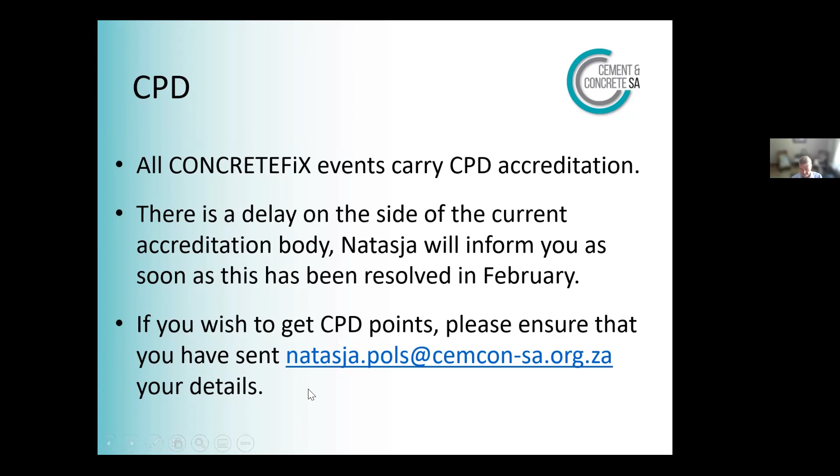Now the good news. On the 17th of February, next month, at 10 o'clock in the morning, there'll be a site visit arranged by the Inland Branch to the Vlakfontein Reservoir in Benoni. The invite will go out next week, giving you detail on where to book. There will be limited seats available, so keep your eyes and ears open for the invitation. And that afternoon at 3 o'clock, we've got our second CONCRETEFiX for this year, with speaker Mike MacDonald talking about his chapter on control of concrete quality and quality systems. So two exciting events coming up in February.

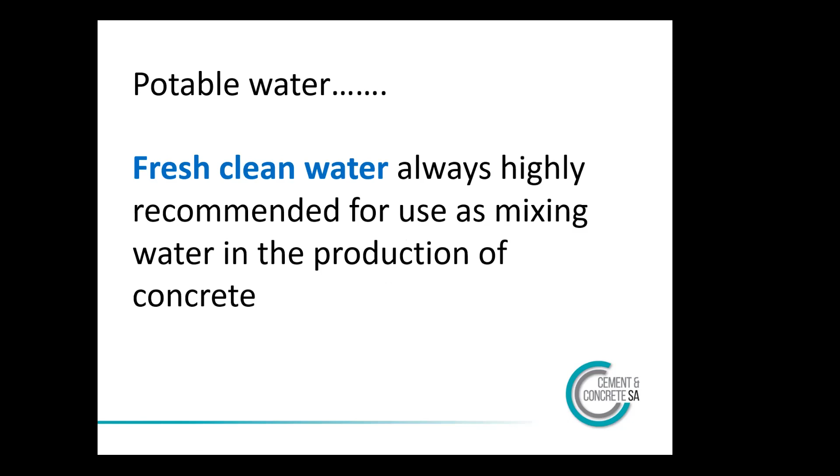So, mixing water for concrete - we always taught on all our courses that we want potable water, water that we can drink, municipal water. That's the water we want for concrete. So fresh, clean water, and I'm going to talk about fresh, clean water now in the next few slides. But that's really what we're aiming for. But are we really aiming for that? I think after this presentation you'll see there is scope for not always using fresh, clean water.

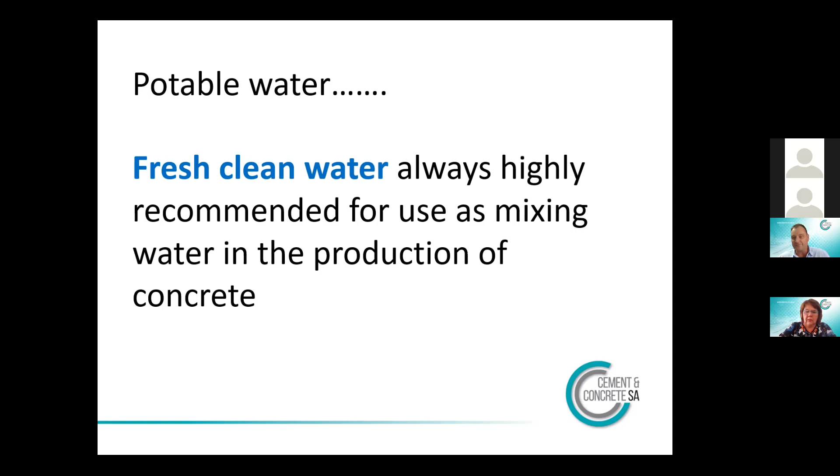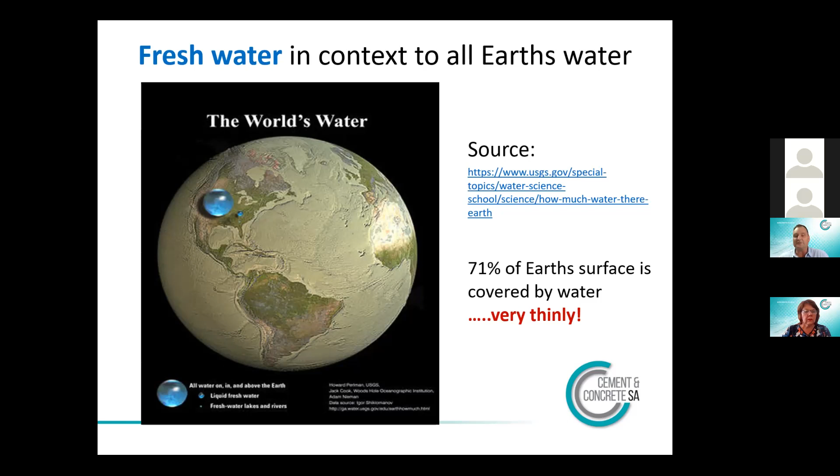That's the fresh water. Remember, I told you we want fresh, clean water for our concrete mixing water. So that's all the fresh water in the world. You probably won't be able to see it easily, but there's a very slight dot below the second biggest one, my cursor is on it. If you look at the bottom of the slide you'll see the little light dot. That's all the water sitting in our dams, reservoirs, lakes, rivers and swamps, and that's the water we use for our concrete. So you can see there's very, very little water available for use by human beings.

Let's look at those numbers. About 2.5% of all Earth's water is fresh water, only 2.5%. And of that 2.5%, 0.3% is found in lakes, rivers, and swamps, and this is the water we use for our concrete. Making matters worse, 87% of that 0.3% of fresh water is held in the great continental lakes.

Every continent has these big lakes. For example, in Russia, Lake Baikal contains about 22.6% of all the available fresh water. And in Africa, its Great Lakes hold 29% of that 87%. So you can see there's very little other water. We don't have access to the Great Lakes.

It's quite interesting that in Africa, the nations sitting around the Great Lakes are very susceptible to famine and droughts because they don't have the infrastructure to get hold of that water sitting right next to them. So it's also important for countries, and for South Africa, to have an infrastructure that can deliver fresh potable water to the concrete producers and to the people.

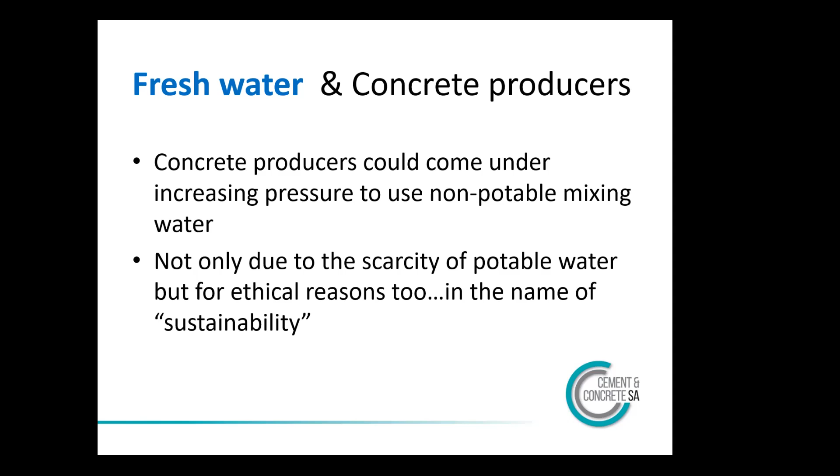Let's get on to the mixing water in concrete. I put this up for a bit of fun: what is concrete mixing water used for? When I was writing this slide, I could think of six things off the top of my head. I'm sure there are others, and it would be nice if you could think of some and put them in the chat. Just quickly think if you can come up with at least six different uses for mixing water in concrete. Why do we use it? Think about it, and I'll put up the list I came up with.

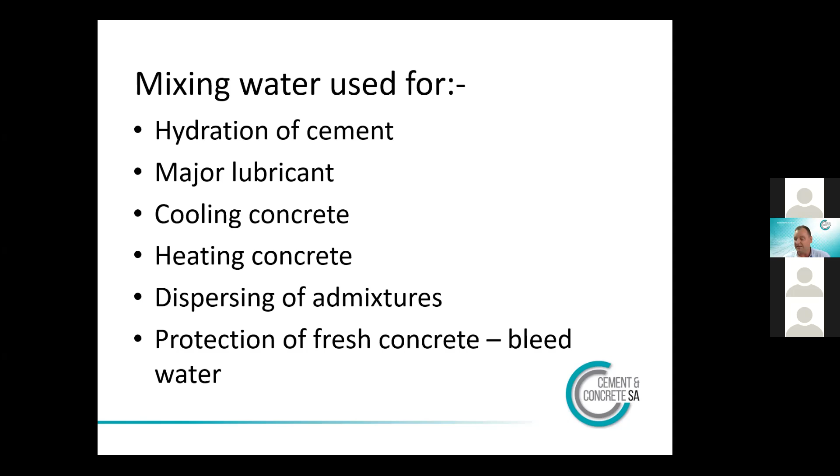Admixtures can be very reactive. You never want to put your admixture straight with your binder because it will latch onto the binder it meets first, so you want to disperse it as quickly and evenly as possible through your mix. Mixing water is used for that, as an excellent disperser of admixtures. Another use I came up with is for industrial floors, these big open sections of concrete vulnerable to drying out. A little bit of bleed water coming to the surface will stop plastic shrinkage cracks and early age cracking in its tracks, so always consider that a use of mixing water.

I'd love to see other people come up with other uses for mixing water in the chat.

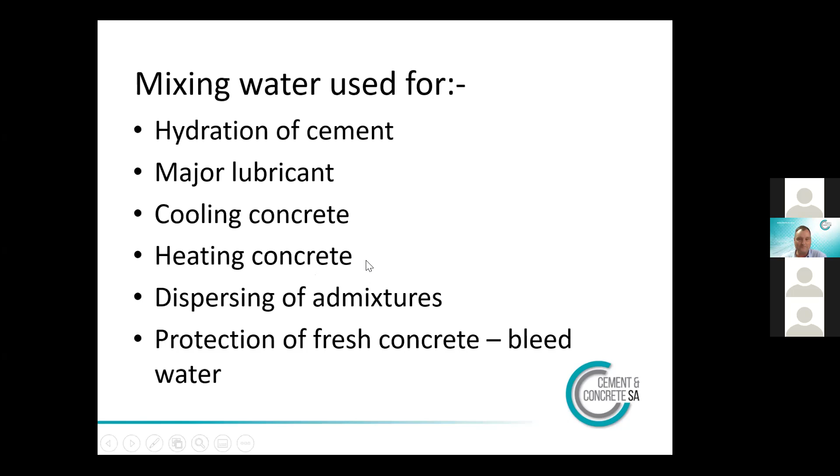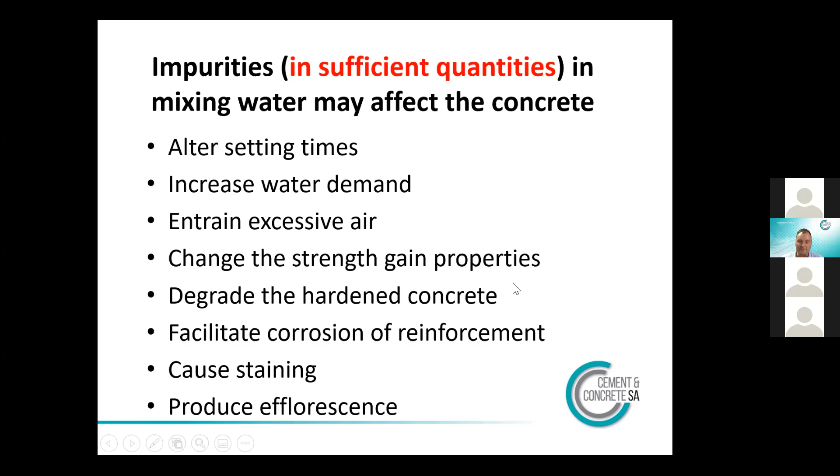Right, so it's a bit of a tongue-in-cheek slide that I put up here. So mixing water can cause havoc with your concrete. And I asked the question, really, can it? What I'm trying to get at here is that don't stress too much. I think a lot of people stress about the mixing water, and most times the mixing water will be fine. So I'll put up a couple of slides here to show you why I don't think you should stress too much. But having said that, always be careful with your concrete.

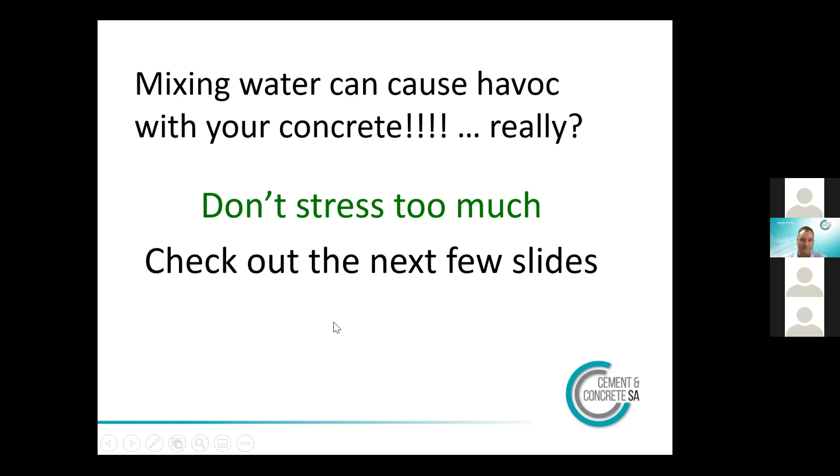All right, so when I was asked to review the water chapter, I thought I'd read extensively about mixing water. And Sue, I know you're watching. I went to Sue in the library and I wanted as much as possible on mixing water. Well, can I tell you something? There's almost nothing on mixing water because people don't worry about it. It's not a big thing in concrete production. And I think there was a little chapter on this in the book by Mindess and Young, referenced in the chapter.

And they said this, and I think this is the sensible thing about mixing water. They say poor quality concrete is produced more often from adding too much good quality mixing water than using the correct amount of poor quality water. And I think that's the sort of thing we've got to remind ourselves about, that it's not always a disaster if you haven't got fresh, drinkable water. Rather put a lot of emphasis on making sure that you get the right quantity, not too much water, than using the incorrect water.

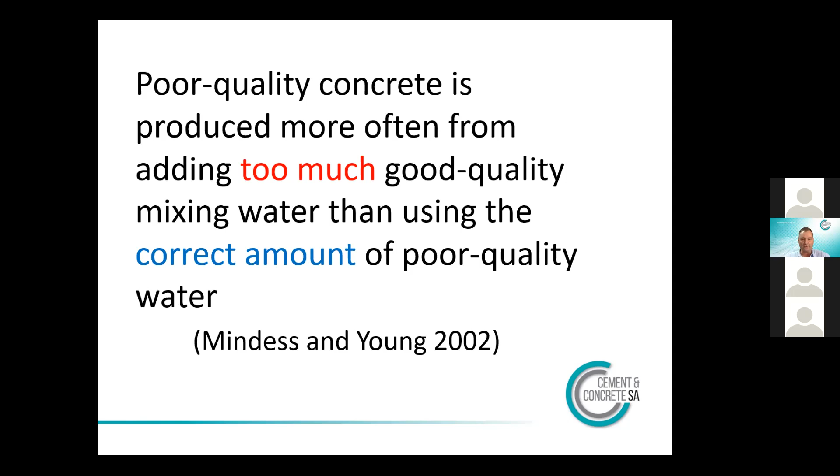This is just an example of if you've got deleterious, bad substances in your mixing water. 2,000 milligrams per liter of total dissolved solids in mixing water only equates to about 400 grams per cubic meter of concrete. 400 grams as compared to 2,400 kilograms. You see, it hasn't got much bang for its buck. You've got to have a lot of impurities in the water to make a big difference.

I know if you're a good admixture salesman, you won't say that your admixture quantities have to be very low to have an effect. You'll always say you need a lot of your admixture to make a difference to the concrete. Why? Because you want to sell more admixture. But the fact is, you usually need quite a lot of material to make a difference to the plastic and hardened properties of concrete.

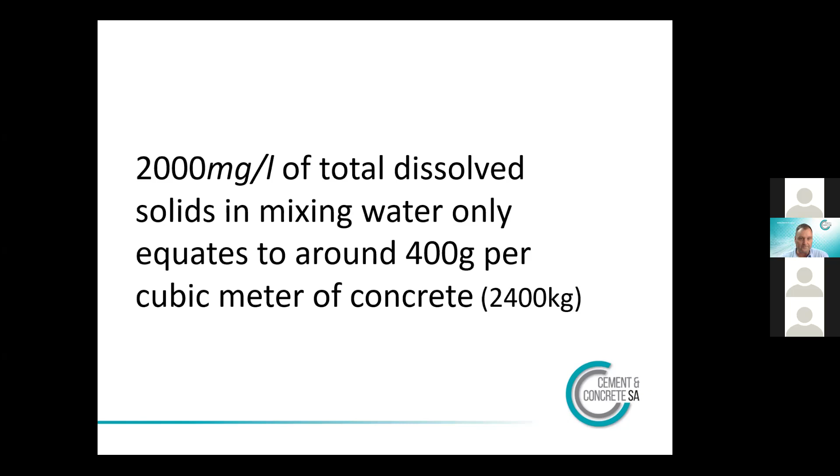Right, so this is another thing that I want you to keep in mind. If the chemical composition of the poor quality mixing water remains consistent, in other words, it stays the same concentration, then the chances are you could design your concrete around the poor quality mixing water. But it must remain consistent.

I had a guy once phone me from Mozambique, and he was saying that they were making concrete. They've been doing it for many years, and every now and again, his concrete just doesn't get the strength. It doesn't set and doesn't gain strength. So I spent about two hours on the phone with him, going through every single scenario that he had tested and double tested, and he said it couldn't be that scenario.

So eventually I gave up and said I can't help you, and I just blamed it on the cement. That's what we always do, we always blame it on the cement. But anyway, as we were saying goodbye, he happened to mention he worked for Illovo Sugar, and there was his problem. Every time they harvested the sugar cane, his concrete dropped in strength, because they were taking the water out of a reservoir that the sugar plantation drained into.

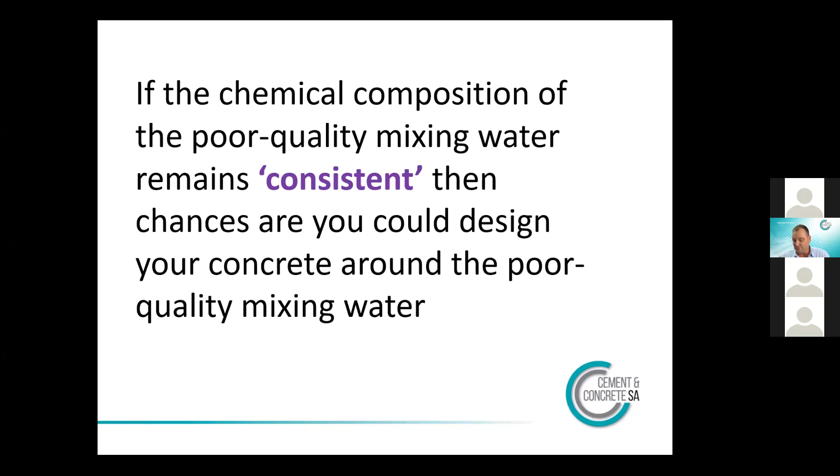We'll go through a few of the important impurities we need to look out for in our concrete. Chlorides, of course, I think everybody knows. We really don't want chlorides in our concrete if we've got embedded steel. SANS 10100 part 2 says to minimize the chloride content in reinforced or pre-stressed concrete, we need to make sure the mixing water has less than 500 milligrams per liter.

And we can't use seawater at all, or brackish water. Accelerators like calcium chloride and other admixtures containing chloride, we need to watch the quantities in those. But remember, it's the overall quantity of chlorides in your overall concrete. So you might have a reasonable amount of chlorides in your water, but if there are no other chlorides present, you might be able to get away with it. Not saying you should exceed these limits, but just remember it's the overall quantity.

And the same applies to sulfates. High chloride contents can also affect the strength of concrete and the strength gain. You often find with chlorides you get an accelerated strength gain, but your eventual potential strength is dropped a bit.

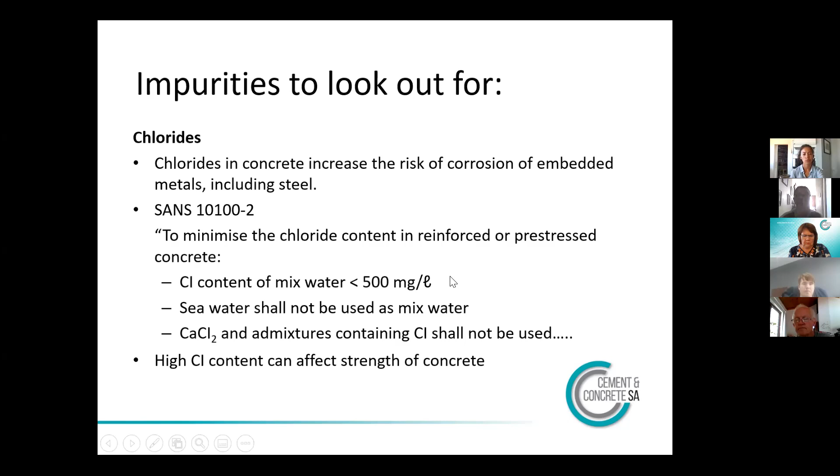Sulfates - I don't like spelling sulfates like this, but in the Fulton's we spell it this way because that's the internationally accepted way. But the British way is spelled with the 'ph'.

I think we all know sulfate attack. It can react with hardened cement paste, causing expansion, softening and spalling of the concrete.

SANS 51008 is the standard for mixing water, and that gives an upper limit of 2,000 milligrams per liter in sulfates. SANS 10100 Part 2, which is basically a guideline, a best practice for concrete works, limits it to a maximum of 4% by mass of the cement.

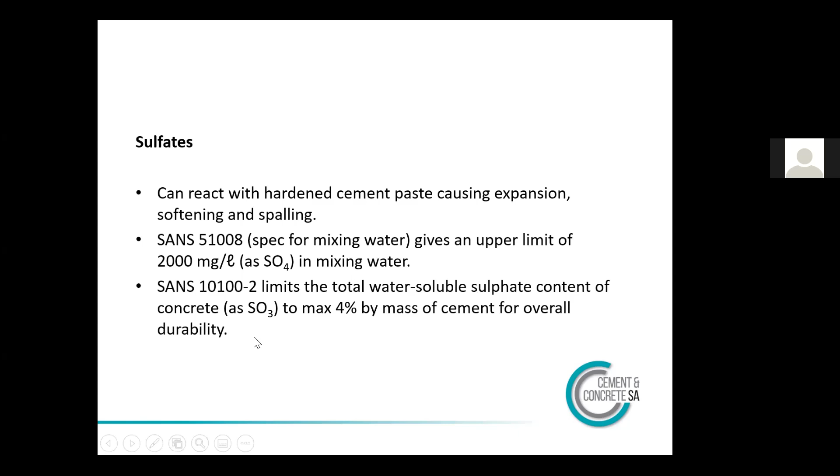Sugar is a funny one because there's an anecdote - people always used to say the guys with the ready mix trucks used to drive around with a bag of sugar and put it in the back if they didn't want their concrete to set.

So we really want to limit our amount of sugar in our concrete, and there's also a reduction of 28-day strength. So we try and limit it to below 500 parts per million of sugar in mixing water. Generally you won't have any adverse effects. I think the code, you'll see later, limits this to a much lower amount, but you'll probably find the standard is quite conservative.

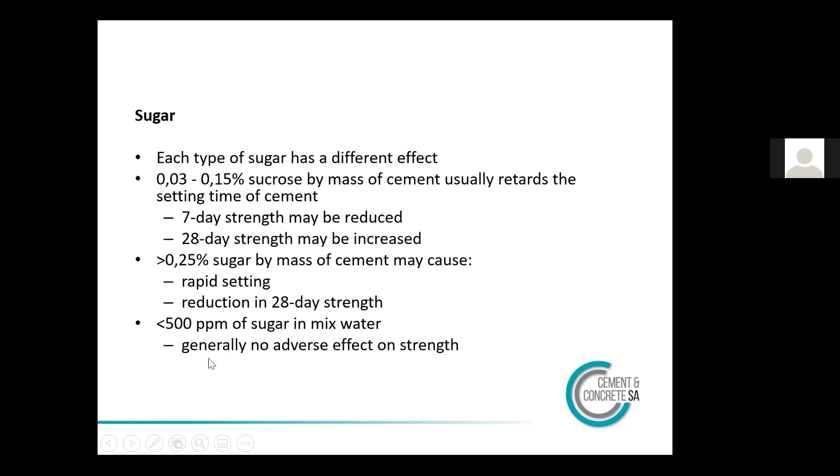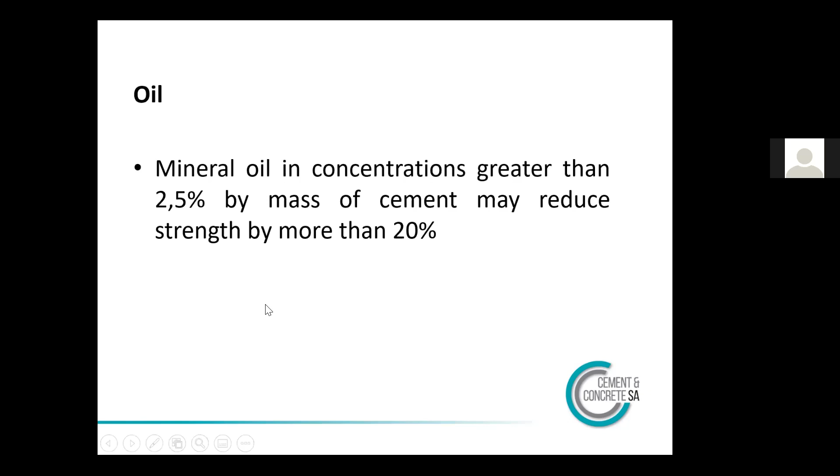Humic matter, maybe all of us just call it organic matter. It's created by the breakdown of carbon-containing components of animals and plants, and typically they retard setting and decrease the strength gain. You can look up more impurities in chapter 5 of Fulton's.

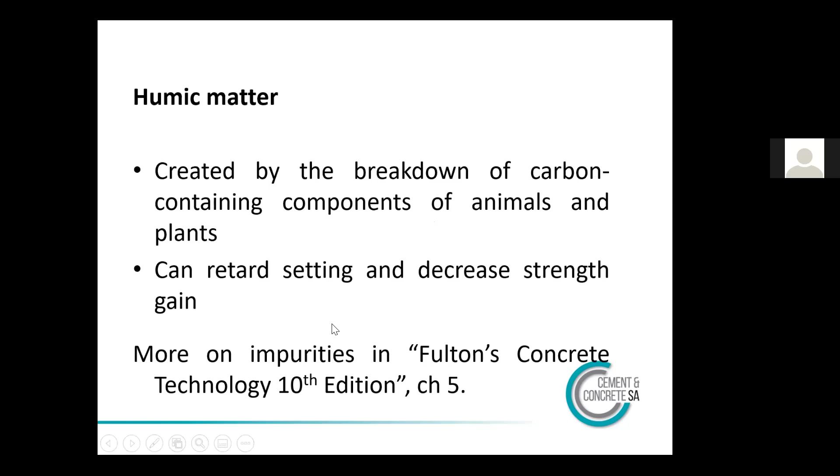All right, natural waters occurring in South Africa. There was a Mr. G.W. Bond, not James Bond. In 1946, he did an intensive survey of all the natural waters occurring in South Africa. Basically, the outcome of that is that most are suitable for using as mixing water for concrete, with a couple of exceptions. Dissolved salts, mainly in the northwestern Cape, tend to be a very salty water. We talked about that earlier.

River water in sugar farming areas is not suitable. Remember, turbid water contains floating solids or solids suspended in the water - clay and silt. Silt tends to filter out quite easily, but clay doesn't settle very quickly. You should really have big settling tanks if you're using turbid water, to let it settle before using it.

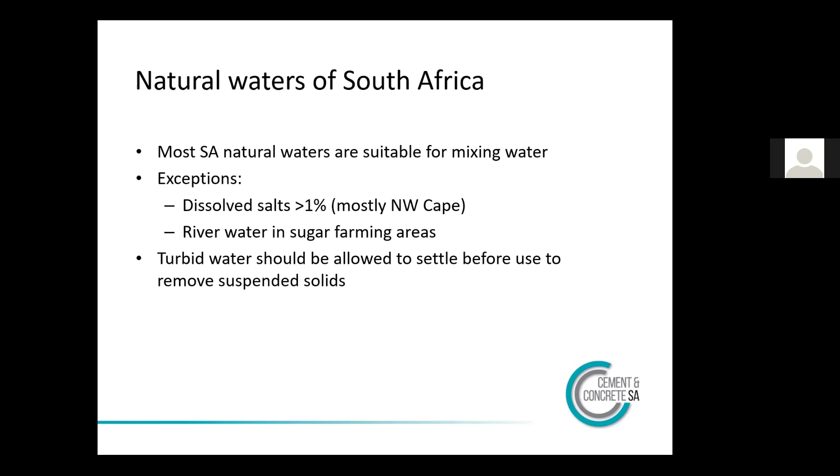So we come to the code SANS 51008, which is the European code 1008. It covers mixing water for concrete, specifications for sampling, testing and assessing the suitability of water, including water recovered from processes in the concrete industry, as mixing water for concrete.

To be honest, I find standards hectically boring things. Anybody who has to work with standards, I feel very sorry for them. But anyway, this code, I looked it up quickly before the lecture - it costs 466 Rand and 55 cents. That's what it costs. It's well worth getting.

If you're going to produce concrete, or you're an engineer wanting to specify your concrete, it's well worth getting this, because it gives you a lovely process of going through the water that you potentially want to use with your concrete. And if you've done the testing according to 51008, if something goes wrong later, you can at least say, listen, I did the water testing properly, the water is okay.

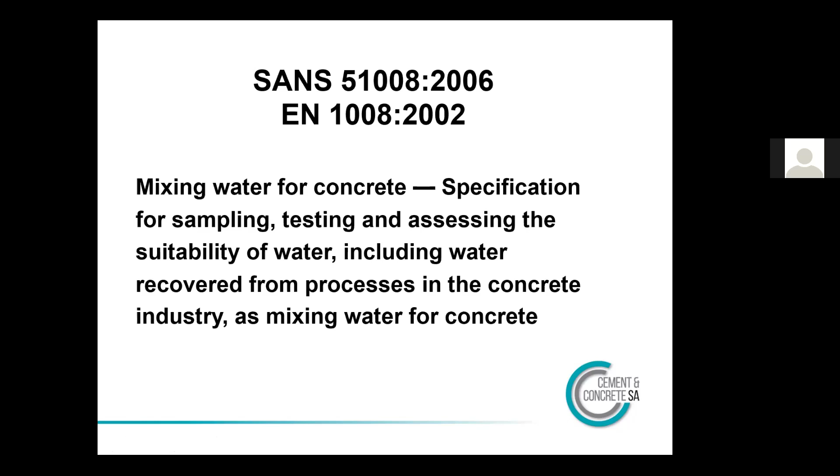Just before we get into the actual standard, let's talk about the South African standards that point to this mixing water code. Your SANS 2001 CC1 is basically a requirement - you have to do your structural concrete according to this standard.

And there it says water shall be clean and free from injurious amounts of acid, alkalis, organic matter, and other substances that could impair the strength or durability of the concrete or metal embedded in the concrete. And where required, in terms of the specification data, it must comply with the requirements of SANS 51008. So it does point, it says use 51008.

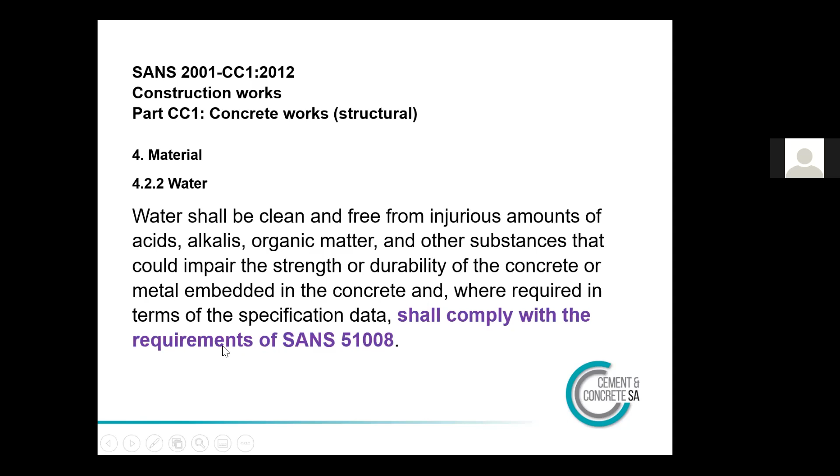Make sure it complies with that. And then the SANS 10100 Part 2, which is the guideline and best practices for concrete, also recommends that water should comply with the requirements of SANS 51008. And if in doubt, we need to specify that it needs to be tested according to 51008.

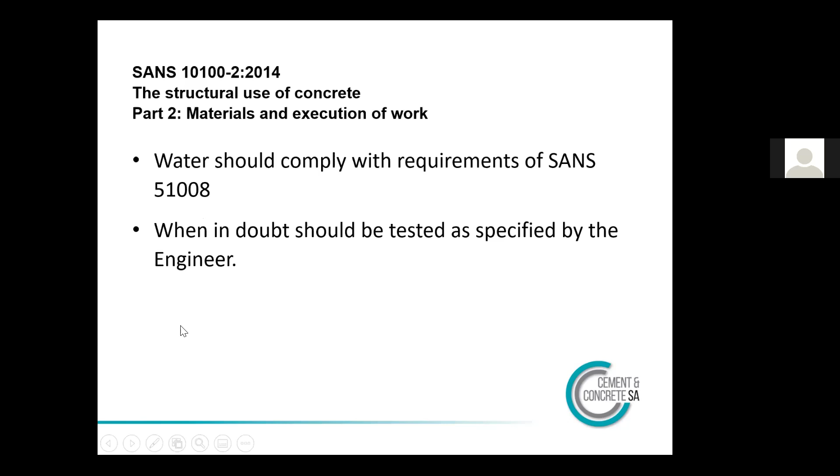If we have to do further testing, then we do a preliminary assessment before we go to chemical properties. If we're okay with the preliminary assessment, we might be able to use the water. If not, we might want to go do some more chemical testing. And if it passes all the chemical testing requirements, then we can go and check for setting times and strength. The code tells you how to sample and tells you what tests to do.

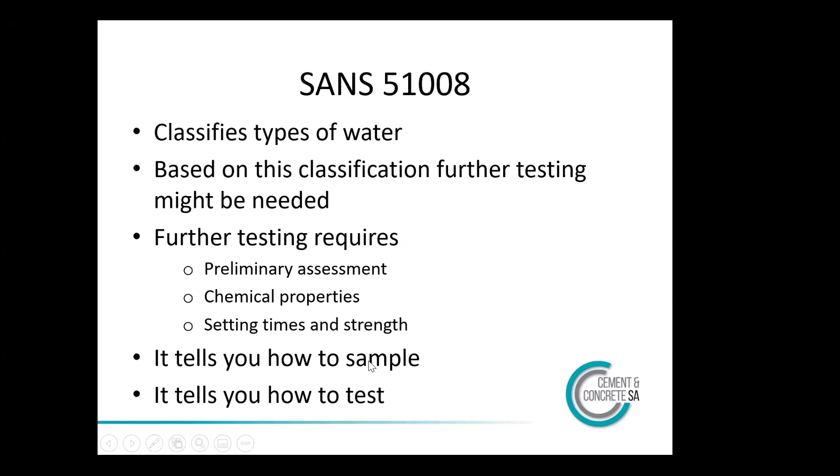But you guys from the ready mix companies, I think you are pretty good at reusing your recycled water, your wash water, etc. I think most good ready mix companies do use it. It saves money, and in many cases it can lead to a strength gain, can give you an advantage by using it.

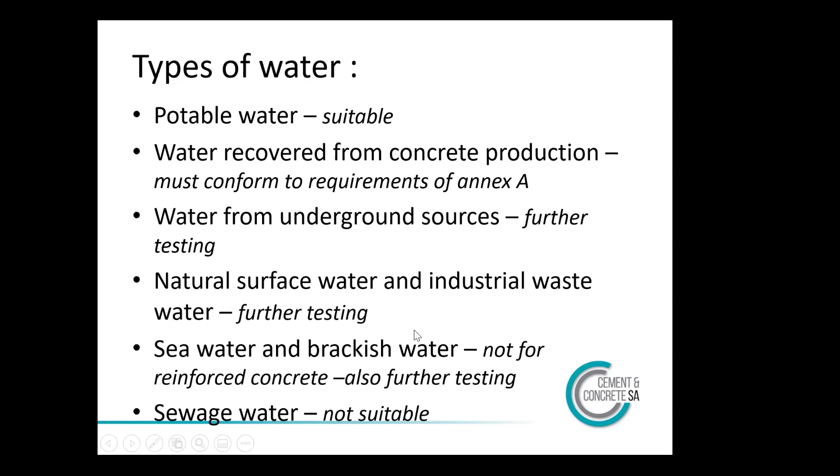Water from underground sources, you might want to assess it further. Natural surface water and industrial wastewater, you would also need to double check by doing further testing and assessment. Seawater and brackish water, you can't use it for reinforced concrete, but you can use it for non-reinforced concrete, but I would do further testing. You want to know the setting time, the eventual strength it gets to, and design your concrete around it.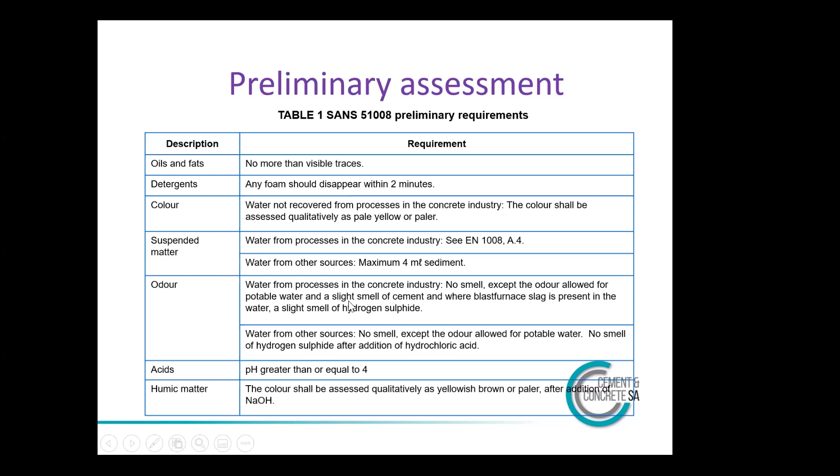All right, so you then go and do the chemical properties, and you check for your chloride content, your sulfate content. If you've got reactive aggregate, you'd be worried about your active alkali content. And then there are a few other contaminants that they mention. It's not really clear why they chose these particular ones, but maybe they're the ones in Europe that come up the most often, so I'll bring them up now.

Okay, so sugars, you see how they're limited to below 100 milligrams per liter. Phosphates, nitrates, lead, and zinc. So all of these - it's quite interesting that the top 2, sugars and phosphates, and the lead and zinc, they tend to retard the setting and in some cases the strength gain of the concrete. It's just the nitrates and nitrites that we worry about, because they tend to accelerate the setting time. And the guys that work for admixture companies will know that a lot of accelerators are based on nitrates.

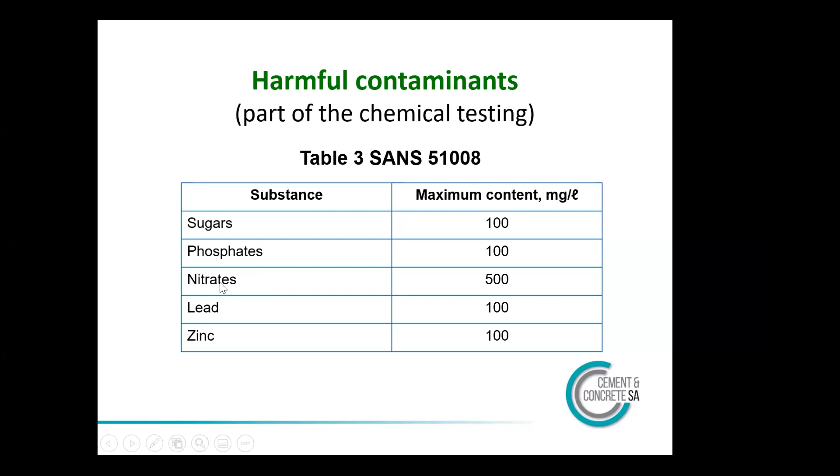All right, so the SANS 51008 requirements for setting time. Typically the initial setting time, not less than 1 hour, and there should be a 25% tolerance when compared to just a specimen made with distilled water. Final setting time, not more than 12 hours, and then of course a 25% tolerance on final setting time when compared to a specimen made with distilled water.

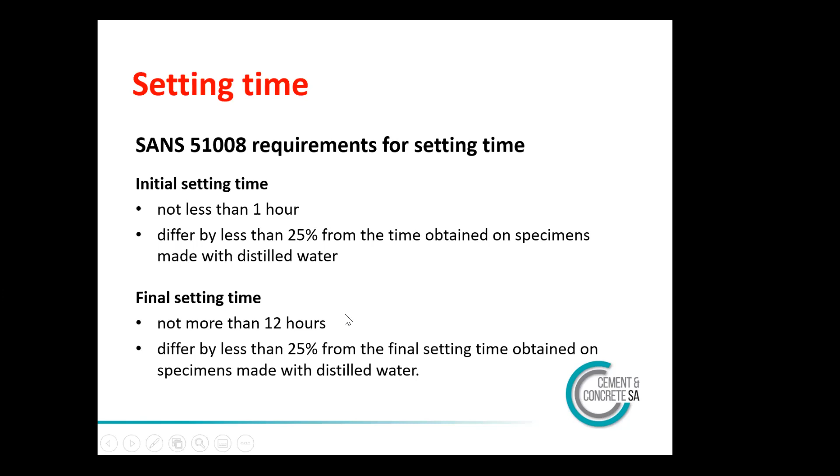And then the strength of the mortar, the requirement for the strength, the mean compressive strength at 7 days. You see, they check it early on. You want to check it early on. Should be at least 90% of the mean compressive strength of the corresponding specimens prepared with distilled or deionized water.

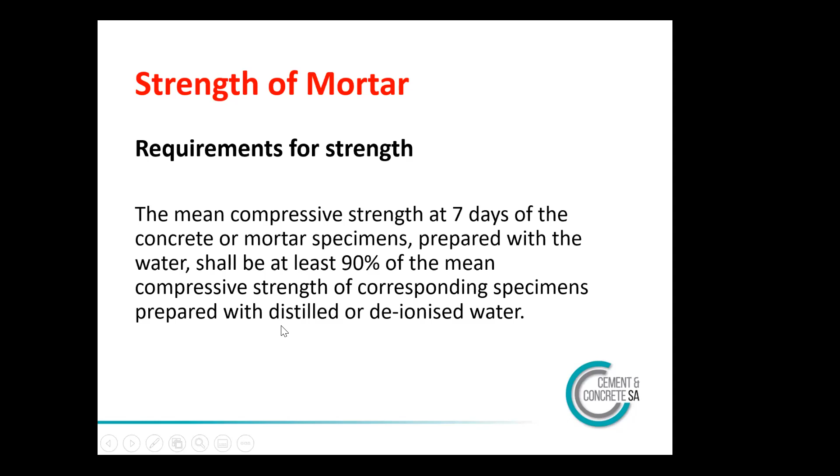So Annex B in the standard gives you a nice scheme. So if you're worried about your water, you go to this Annex B and you test it according to this. Step 1, is it potable water? Yes - great, accept the water. Is it sewage water? Yes - well, then reject it outright, don't go further. And you go through this whole thing, it's listed there. I just noticed on this point 5, seawater or brackish water, it says yes, accept it.

Here it says use only for concrete without reinforcement, but I would go and do further testing. If it was seawater, I would need to know its setting time and strength gain properties, etc., and design my concrete around using the seawater.

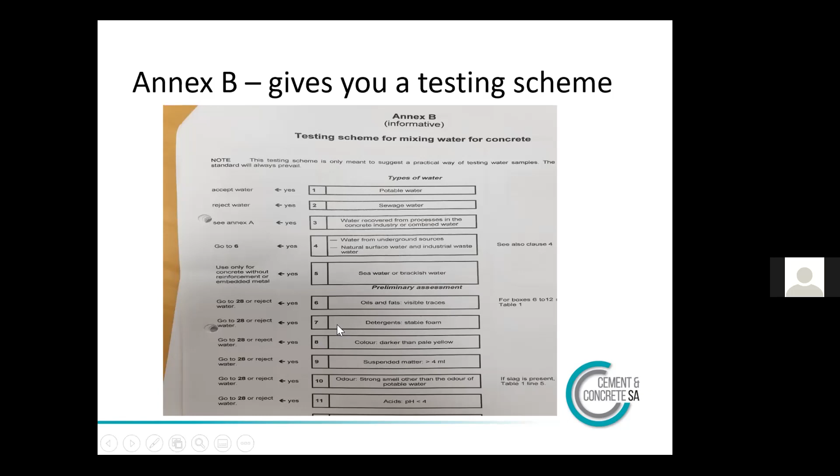Yes, it doesn't look like it now, but good quality water will become more scarce. We could be pressed into using non-potable water in the future, and I don't really want to be pressed into that. I'd like to see people using more non-potable water, locking it up in concrete, and you get some good greenie points for that. Concrete always gets a bad rap, and in fact, concrete is one of the most incredible sustainable, low-carbon materials that you can use for building. So we can get some brownie points for that.

If non-potable water is used, it must be consistent. In other words, it mustn't change. You ready-mix companies are always complaining to the cement producers about variability in your cement, so you know all about that. You don't want your cement to vary because your concrete goes haywire. It's the same thing with mixing water. You don't want it to vary, and then you can design your concrete around that.

Remember that most South African natural waters are suitable. Northwest Cape is not suitable, but just think about where you are and the chances are that you're going to be able to use it. And then if there's any doubt at all, just do the tests according to SANS 51008. I get people phoning me up asking, can I use this water, is it suitable? And I say, just go through the process in 51008. That is the process to do, and you'll be fine. The chances are you'll be able to use the water.

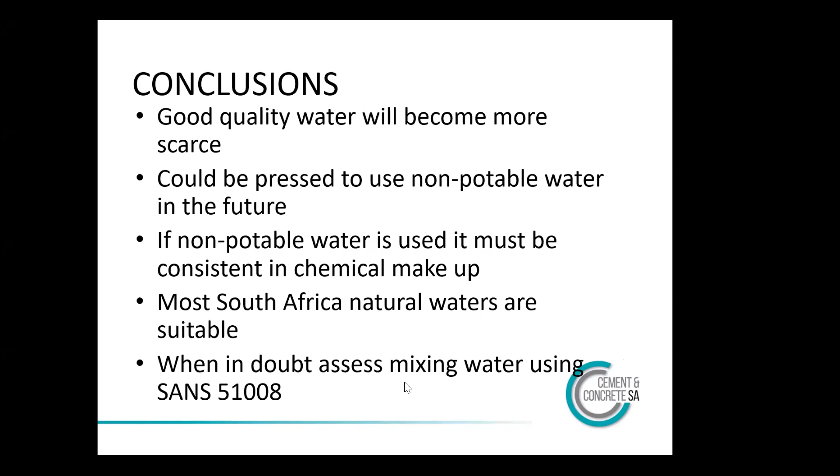Any questions? Could I just add to that? Any natural lying water, not municipal water, in other words untreated water, I would definitely test. You need to sort of assess it properly.